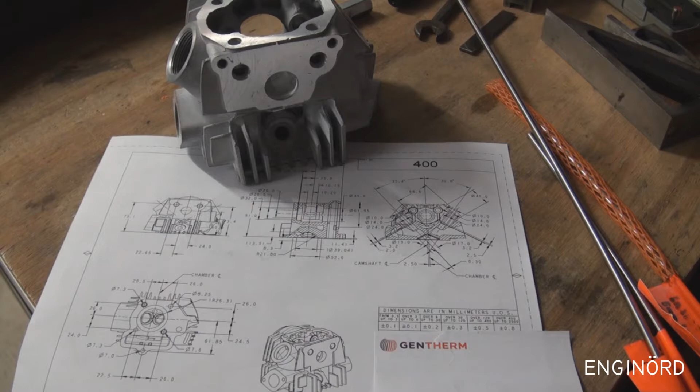You know, the place where ancient artifacts of the industry just lay scattered around for us to admire. Today I'm trying to refine my 3D model and drawing a little bit. I've got this cylinder head, as you can see.

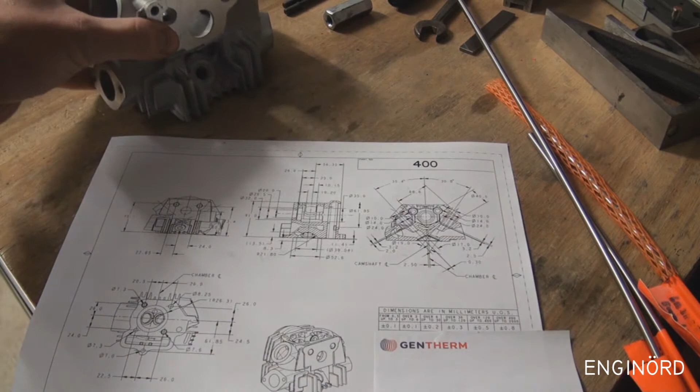And what I did is I 3D scanned the part, and based on the scan I built a 3D model, which is pretty cumbersome. It probably has 500 to 600 features, and based on that I created a drawing. So having the 3D model is one thing, but having the drawing is a completely different beast.

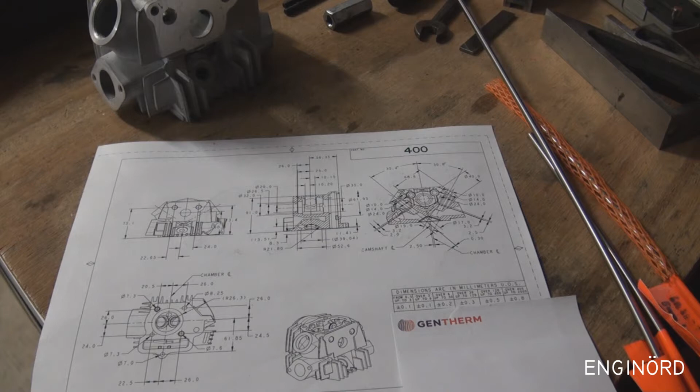I don't know anything about this part, but I need to adapt it to my needs, and so I need to know the exact dimensions. Two of the important dimensions are these two right here. So these angles, those are the angles for the valve. You can see the valve. This is the exhaust valve, and then this is the intake valve, and these dimensions govern the position of the valves.

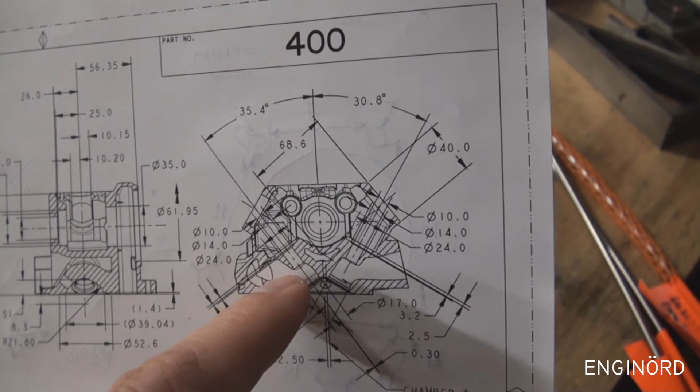So the cylinder head is getting bored, and then there's a bushing that's being pressed in, which is the valve guide, and basically these dimensions will define the exact position of those valves. So these dimensions on the print are just placeholders for right now. They are approximate dimensions. So what I'm trying to do is measure that.

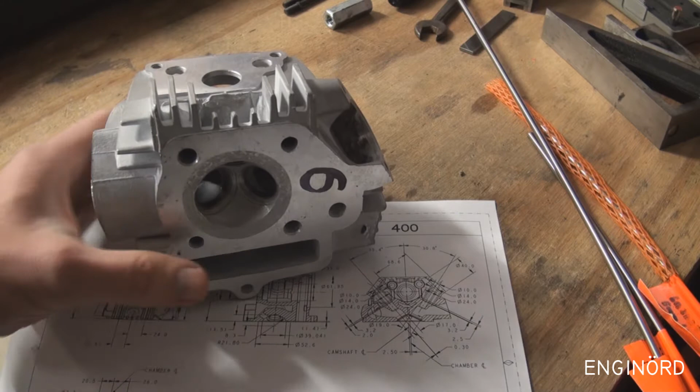Now the 3D scanner is going to give you real nice point cloud data, but one of the problems with the 3D scanner is it's not going to see inside. So like there's this hole, this is the intake bore. It's going to go about 1/2 inch deep, and past that it's not going to see what's inside. So it's pretty much like you are looking at it right now, because there's not much light. You can't really see what's inside.

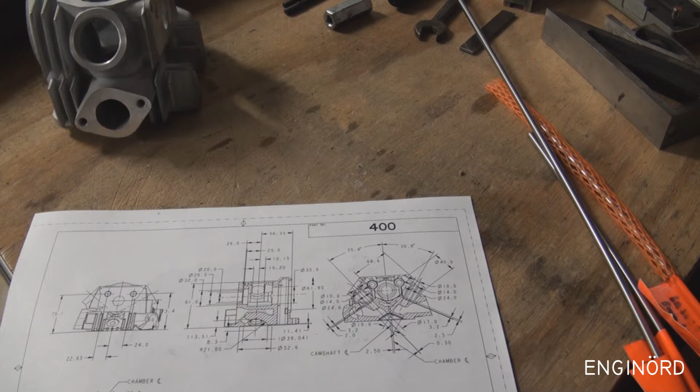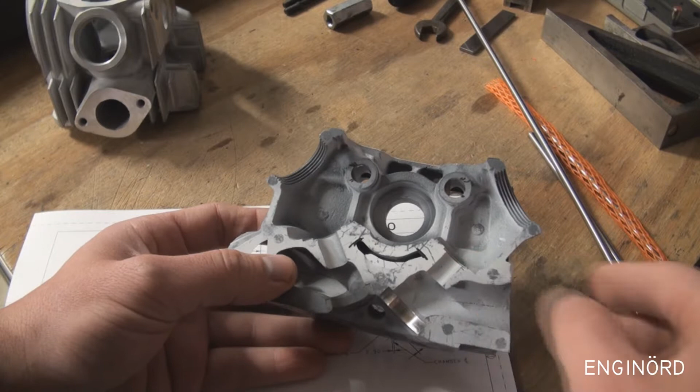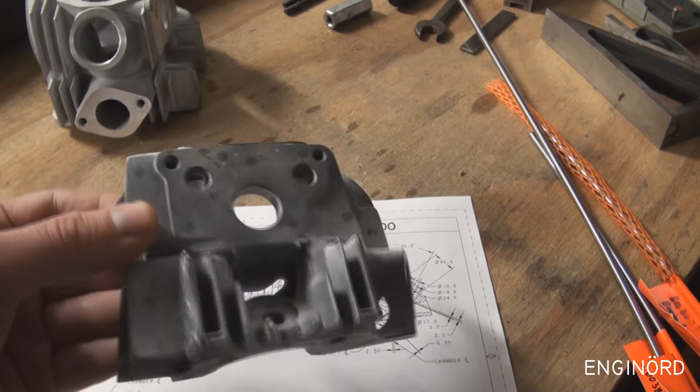So the way I overcame that earlier is I sectioned the cylinder head, and you can see it right here. So now you can pick up exactly the geometry of the intake channel, the exhaust channel, and maybe pick up these edges here and get the angle relative to this bottom plane. This was an older cylinder head, and the new ones I received are slightly different. So now I need to redo my previous work.

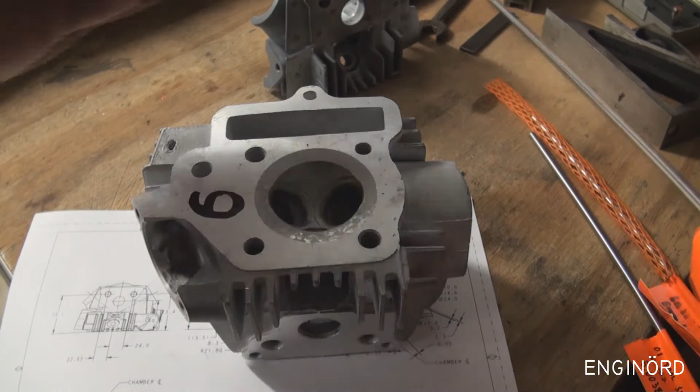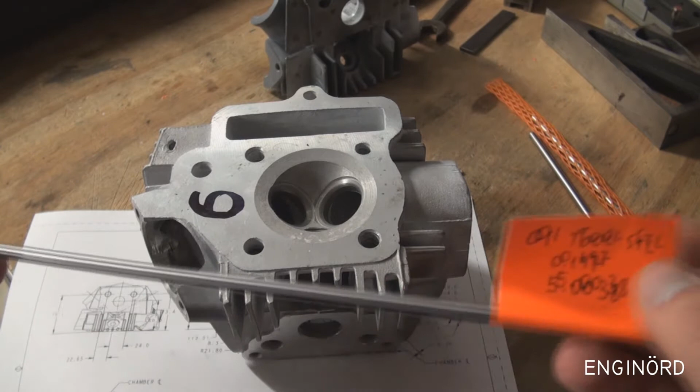So what I came up with is I went ahead and I bought a couple different sizes of these drill rods. They call it drill rods, O1 tool steel. So this designation, that's a nominal size 0.197, which comes out at 5.0038 millimeters. And I just bought a couple different sizes to see which one's gonna fit.

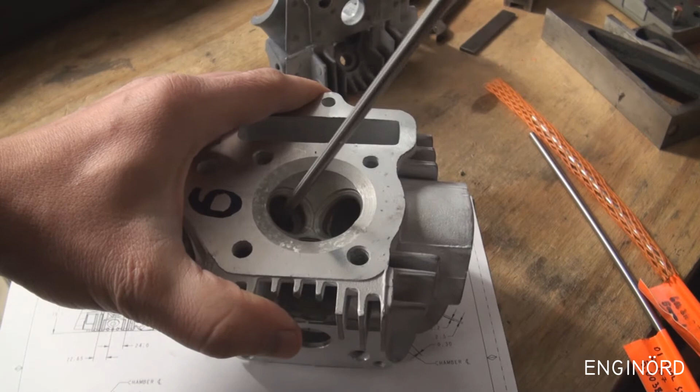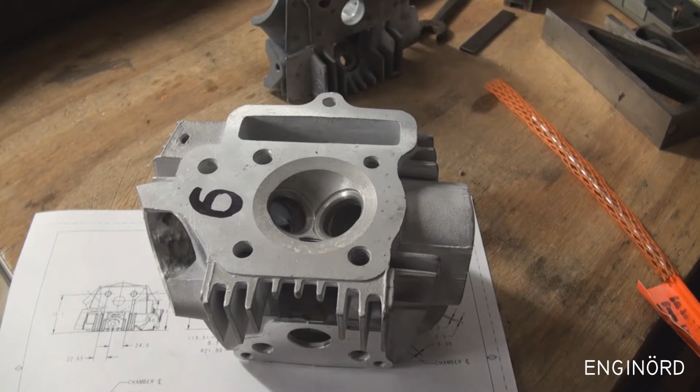So you can see I can use this as a go/no-go gauge. So that's not going into that hole. It's not going into this hole. And I'm not pushing it hard. I don't want to screw up the bushings. So this was the 0.197. Here's another one. This is a 0.194. Okay, so that comes out at 4.9276 millimeters. And you can see that this one slides in. It's got a little wiggle room.

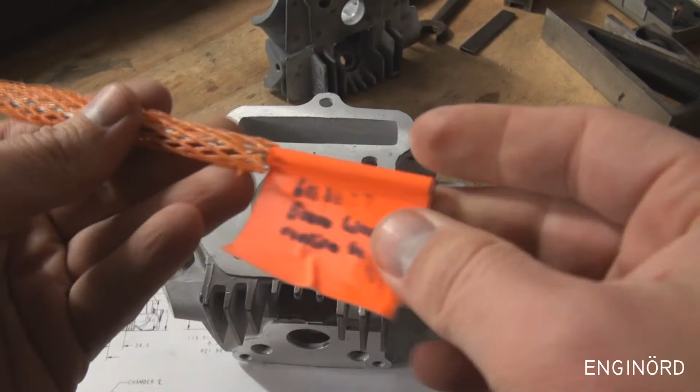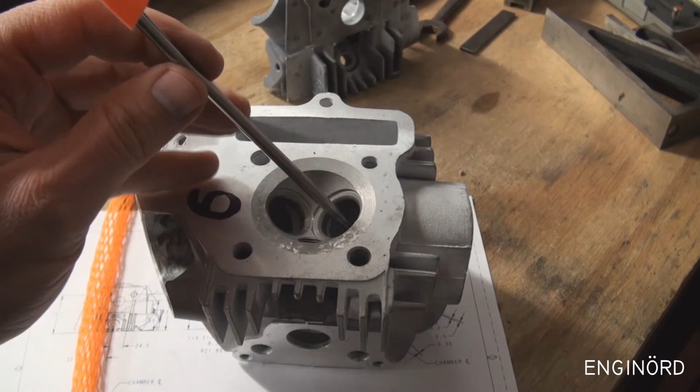And then finally, here's a 5 millimeter rod. This was designated as 5 millimeter. I miked these, and they're pretty much in tolerance. But this is the one that has the best fit. It doesn't have barely any wiggle room, so I'm trying to move it back and forth and I cannot wiggle it. Okay, here's the same thing in the exhaust. So it just goes in and it stays put. It doesn't wiggle.

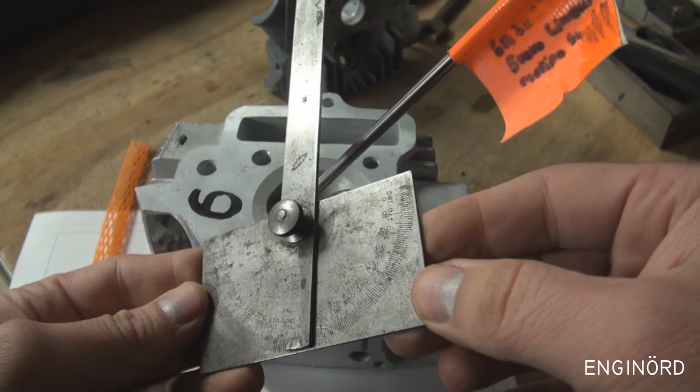So now I have this plane and I have this rod. So it would be easy to use a simple device like this protractor. Okay, it's a little rusty. I'm gonna clean it one day, I promise. So the idea is that I could set it up like so and then hope for the best and basically read the angle down here.

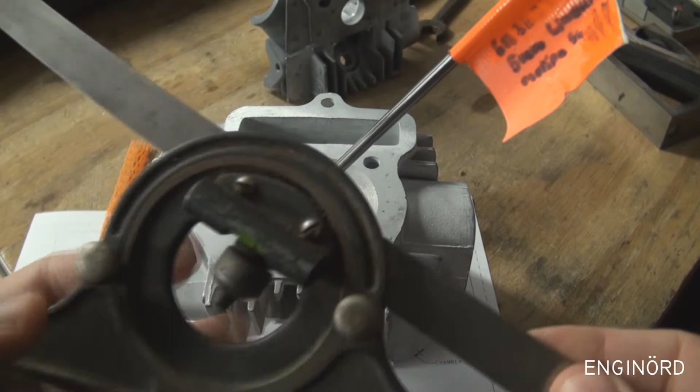But you can see there's several problems with this approach. The first is that this protractor leg doesn't come tangent to the rod because there's a nominal thickness for this guy and for the rod. So the other option is to use a protractor like this one. Okay, I can lay it here like so and then try to bring it close, but again it's not laying on this surface.

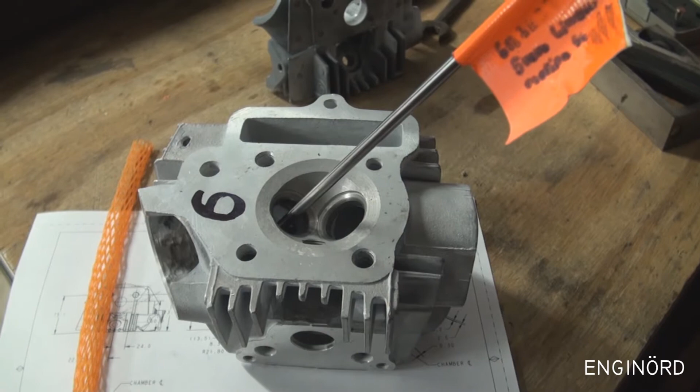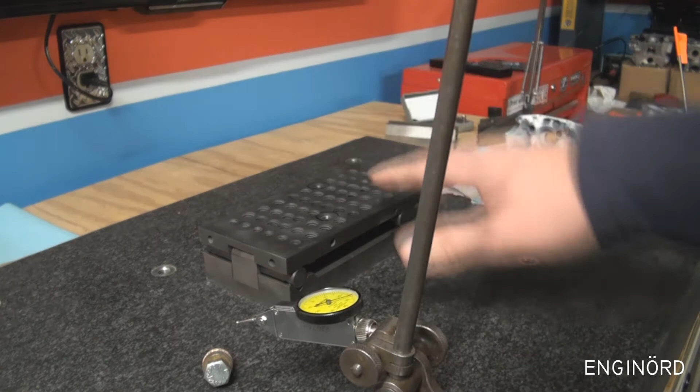So instead of using that protractor, what I'm gonna do is I'm gonna go and use an angle plate or a sine plate. So this is what I'm gonna do. The first thing is I'm gonna go and mount the sine plate down to the granite surface, and for that I'm just gonna use this bolt here.

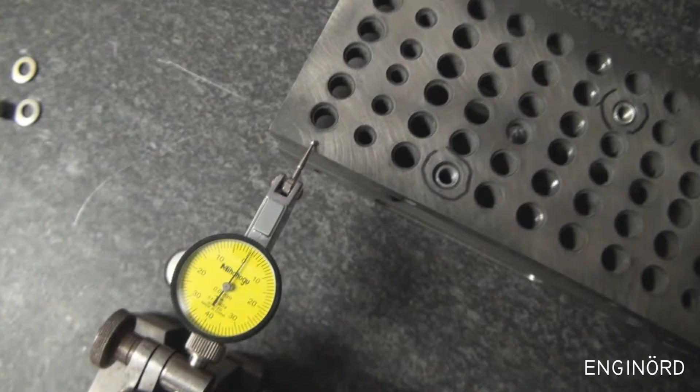Okay, so once it's bolted down, what I can do is set up my indicator and just sweep the surface here. I'll bring you closer. So you can see at this edge right here, the Mitutoyo indicator is set to, let's say, 0. It's close. So 1 division is 10 microns or half a thou.

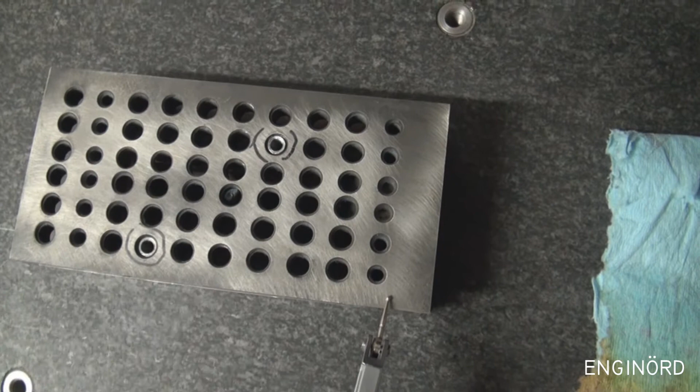So when I'm gonna sweep this, you can see that I have about 4 divisions, so about 1.5 thou difference in height between the two ends. Now that is just something I have to live with. This is one of those tools I don't use really often, so I just blew off the dust and cleaned it. I cleaned the table, cleaned it several times. That's pretty much what I have, 40 microns.

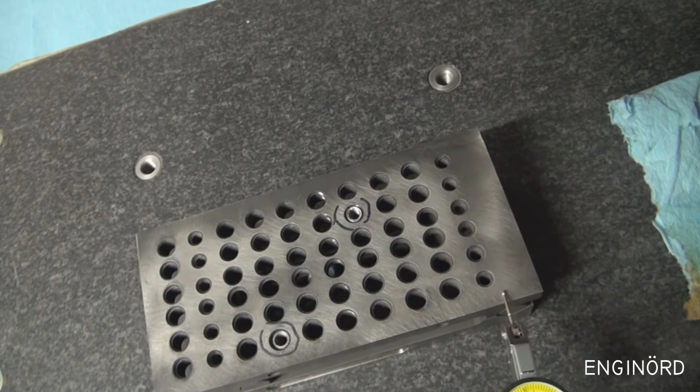So the next thing is I'm gonna take the head and mount the head on the top like so, and then I'm gonna incline the surface, and then the rod sticking out, I'm gonna go and indicate the rod until it's horizontal. I'll bring you back.

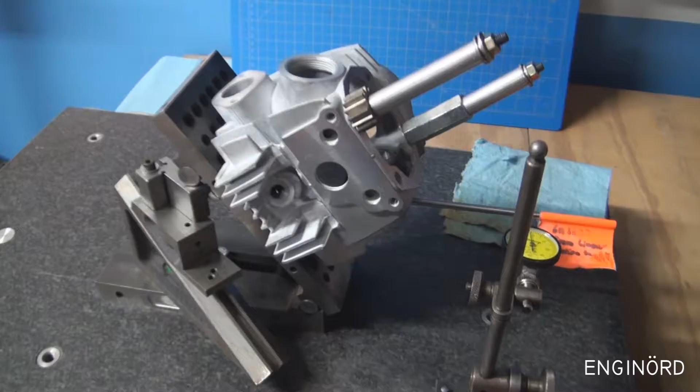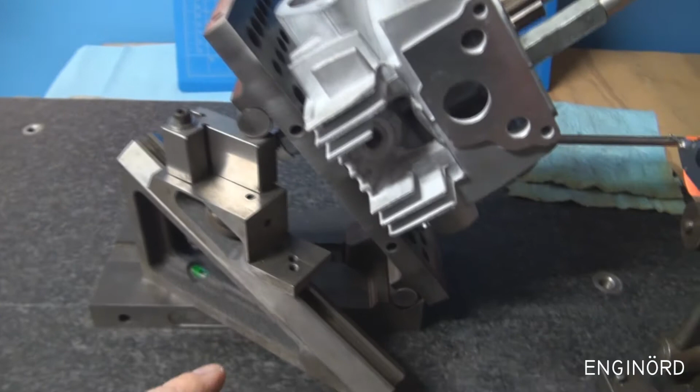So this is the layout. Again, the head is mounted on a sine plate. The sine plate is inclined, and there's the rod, the dowel pin or rod that goes into the socket for the valve. And what I'm doing here is I use the planer gauge to set the height, and I can adjust the planer gauge up and down. Okay, so that will set the height. You can see I'm pressing on this one here, and the planer gauge is reacting that force. So it's setting up this height from this pin to this bottom surface.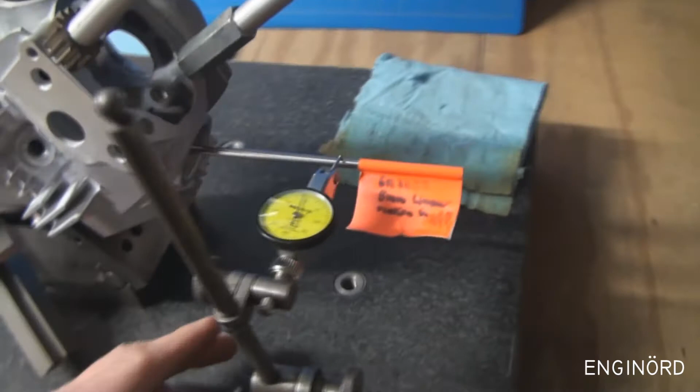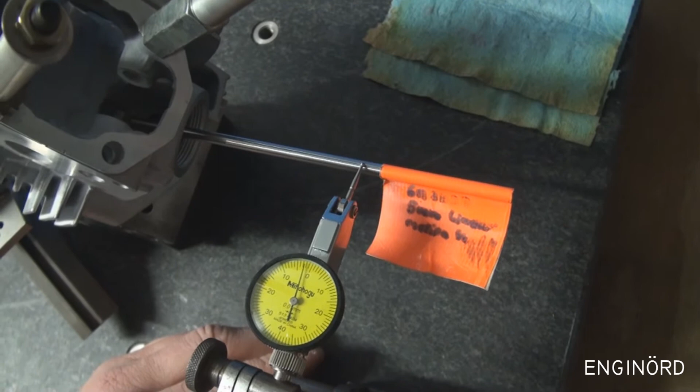And what you can see here is on this end we are running 20 minus, and then on this end we are running, let's say, 0. So 20 microns difference between the two ends. I can also try to sweep this, and you can see that there's 20 micron difference on about 3 inches length. So I think that's good enough, especially knowing that this plate has a certain amount of tolerance built into it.

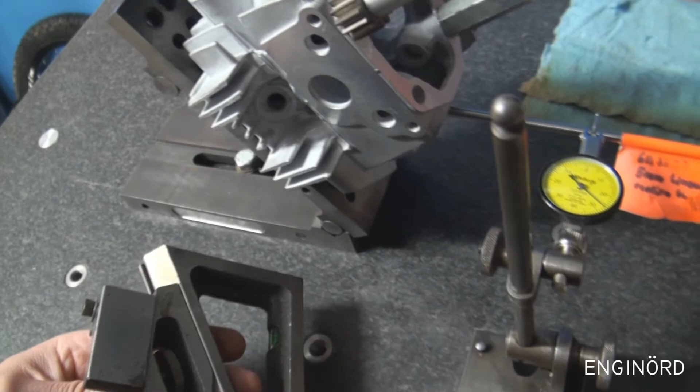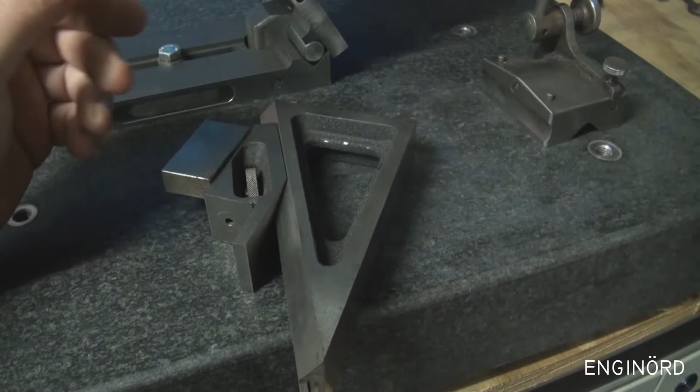Now the next thing is to take the planer gauge and measure this distance, which comes out to 104 millimeters. Look at that, 2 decimal precision. 104.01. So this is what we have. The rise is 104.01. And then the long side is 5 inches because the spacing between the two pins on the sine plate is 5 inches, so that's 127 millimeters.

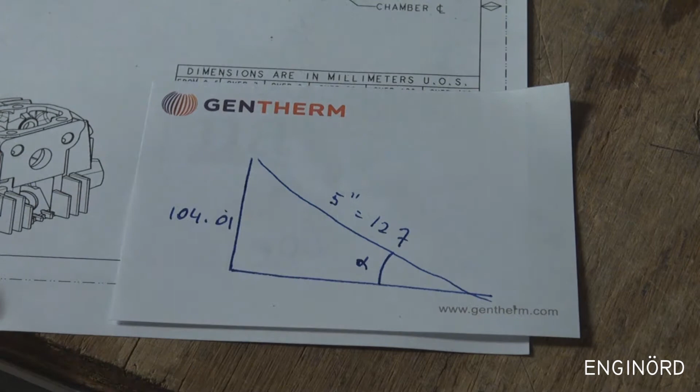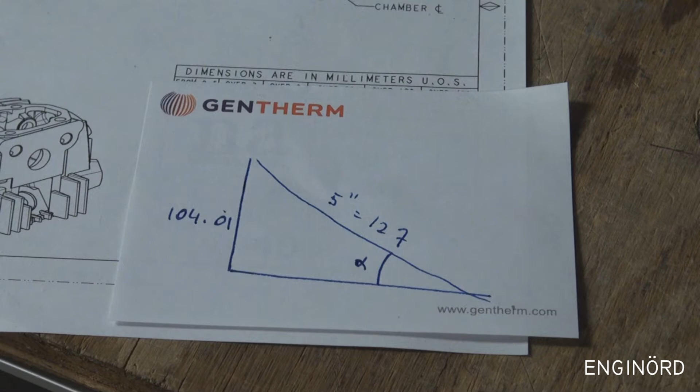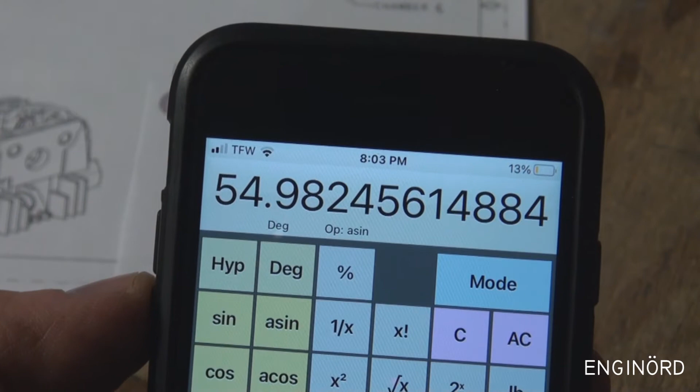So now you can see why it is called a sine plate. If we divide this by that, and then we calculate the sine, that gives us that angle. So 104.01 divided by 127, that's 0.818, and then we need the arc sine of that. Okay, so it comes out 54.98. So we can safely assume that's 55 degrees.

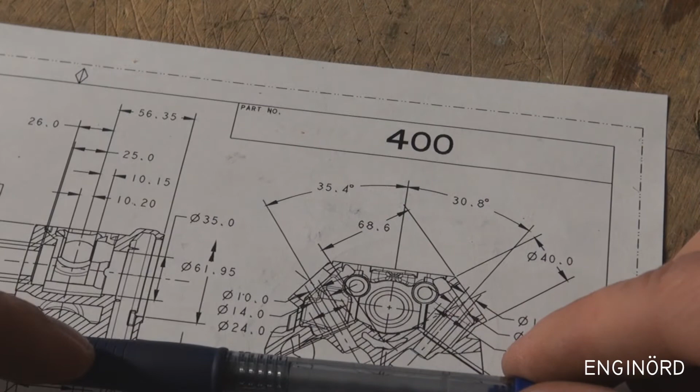This was on the exhaust side, and you can see my print shows 35.4 degrees. So I need to go back and adjust it to 35. So basically I measured this angle here from this plane to there. Okay, so 90 minus 55 would be 35. So let's go and do the other side.

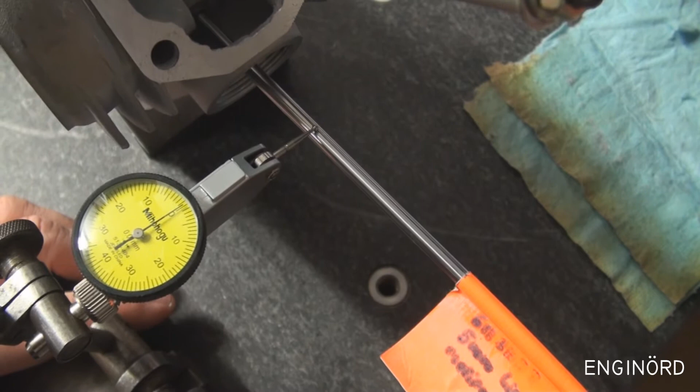So here's the second setup. This is the exhaust. Right now we are looking into the intake side using the same rod. It's placed, and you can see on this side the indicator is 0, and I'm going to try to sweep it, and you can see on this side it is 0 also, so it pretty much stays put. If I move it off, you can see it will go off. If I go back, you can see it will stop at 0. So this leveling is better than what we had previously.

What I did is I added a little machinist jack here. So with the machinist jack I can fine tune the height, and I'm copying the height the same way. So this is the planer gauge. Just gonna slide it in there, so it's the same height. I can take out the planer gauge and go and measure the size. So you can see the size this time is 108.53.

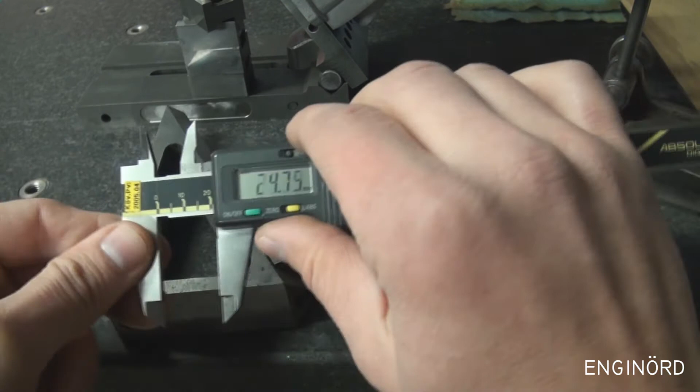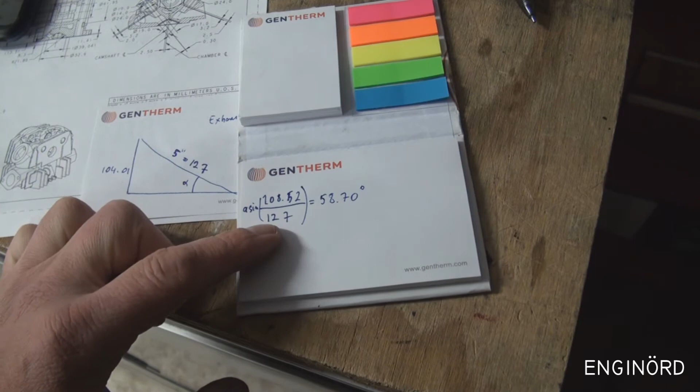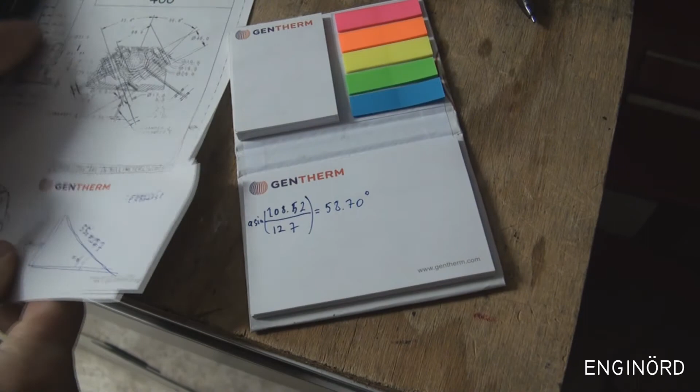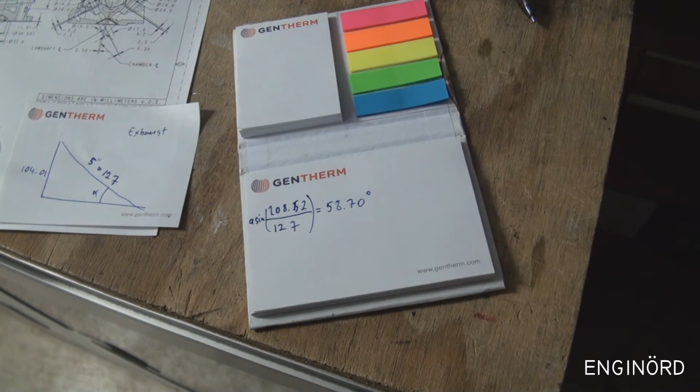Let's do it again. 108.51. 108.52. So 108.52 divided by 127, and the arc sine of that is 58.70 degrees. And my previous angle that I had was 30.8. So it's pretty close. I don't know why it is not an even number, but that's just what I have. I'll probably lay out a couple more heads and try to measure those and see what the average number is.

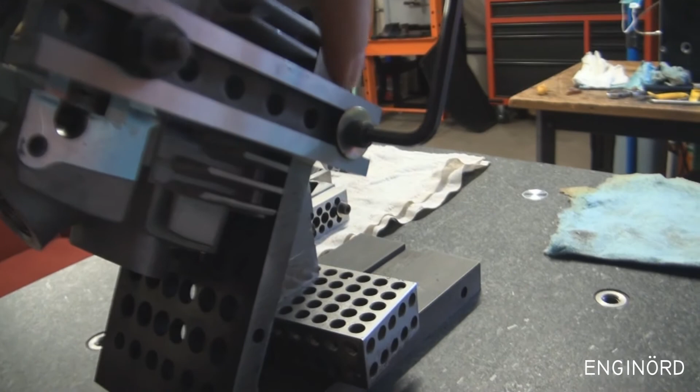I know this looks strange and suspicious, I changed the layout. So what I found out is that the edge of the sine plate might not have been parallel to this machined surface, or the machined surface on the other side. So what I ended up doing is I added a fence. You can see the fence here, it's just bolted on. It's got a little spacer. And now this machined edge is parallel to the machined edge of the sine plate.

So that when I angle the sine plate, I can be sure that this pin is parallel to the edge of the sine plate. So again, when I incline the sine plate, I can be sure that the plane in which the pin resides is parallel to this plane here.

And so I just repeated what I did before, indicated this end. So you can see that right there, it's 10 plus, and then on this end it's 15 minus. So I was trying to be within 20 microns. This is 25 in this case. Maybe it's just me poking around with the left hand in a workshop; an indicator is not perfect.

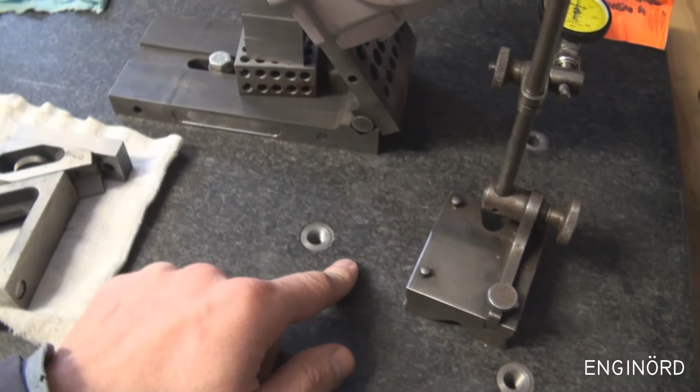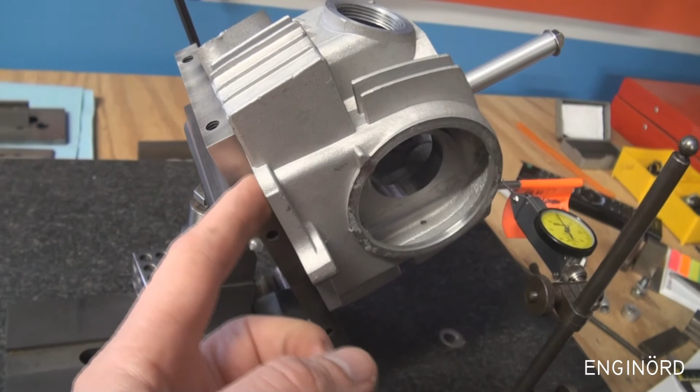So basically this is parallel to the black top, okay, and then this little machinist jack helps me to move it up and down a little bit, and that way I can come up with the angle. So I did two measurements. On the first measurement I was mating this surface to the angle plate, and then in the second set of measurements I was mating this plate to the angle plate, and the numbers are in and they're pretty consistent.

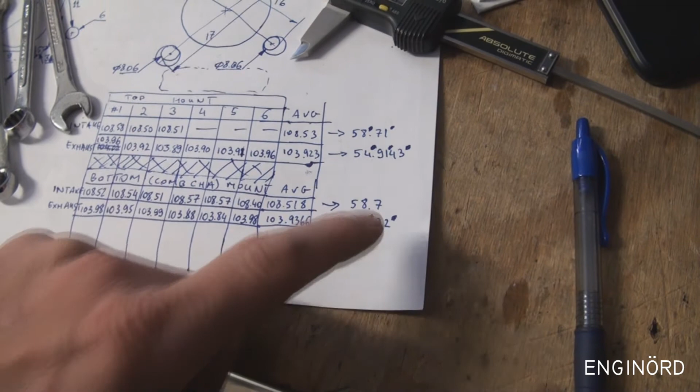So the intake side is 58.7 degrees, and then the exhaust side is 54.92, so we can safely say this is 55 degrees. So what I'm going to do is create a test and look if I can find the angle for this plate here, which is precision ground, and so that angle should be really precise. So let's do a test.

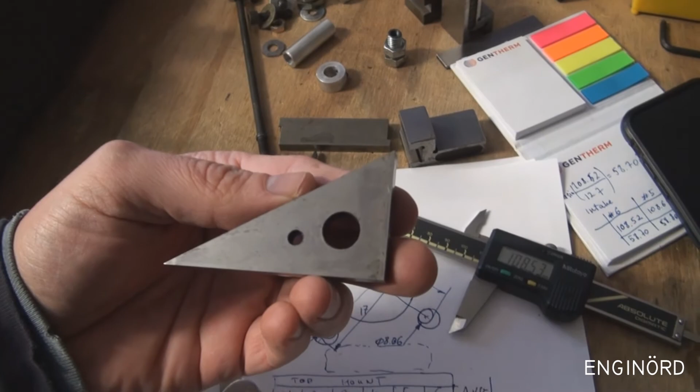So you can see the setup. I inclined the sine plate, and right here is this precision angle plate. Okay, so I can now move my indicator along that surface. So you can see the tip of the indicator is on that surface, and when I move the indicator, it's mostly just frictional. If I move it this way, you can see it changes like 10 microns maybe. So you can see this way it doesn't change much. Again, if I move it left and right, it might change 10 microns.

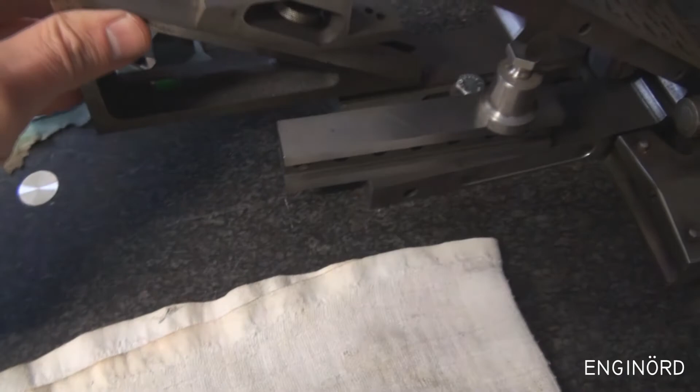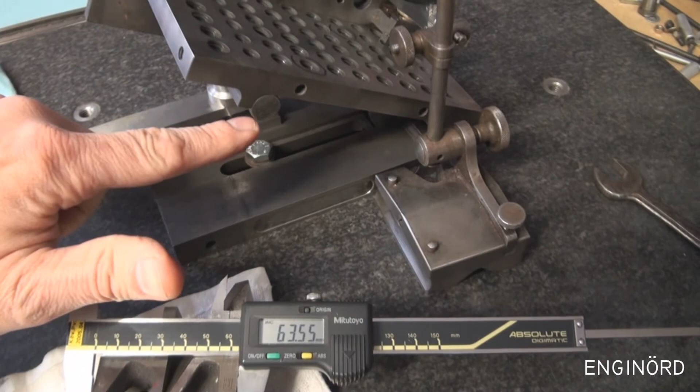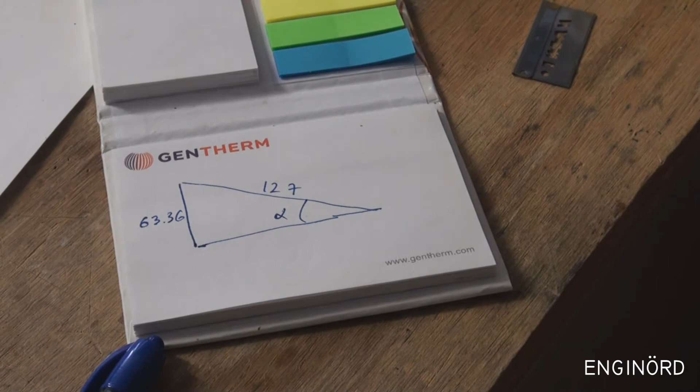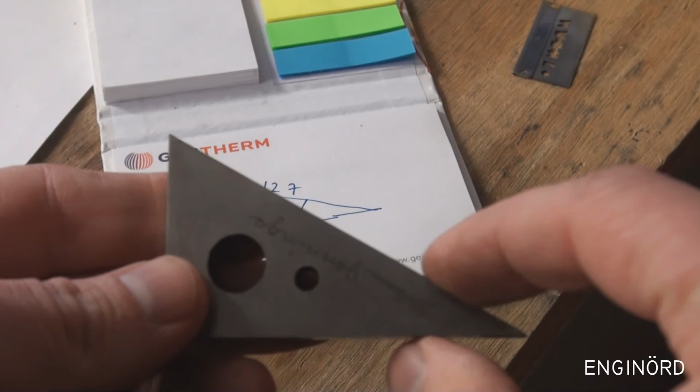So now I can go and take my planer gauge, put it in there, adjust the planer gauge, and then get the size. So here's the size, 63.36. Again, I'm measuring with the planer gauge this height here, 63.36. So 63.36 is the height or the rise, and then 127. So 63.36 divided by 127 is 0.4988, and then the arcsine of that is 29.92. So that's a 30-degree angle. So basically this angle here is 30 degrees, and it's a precision ground plate.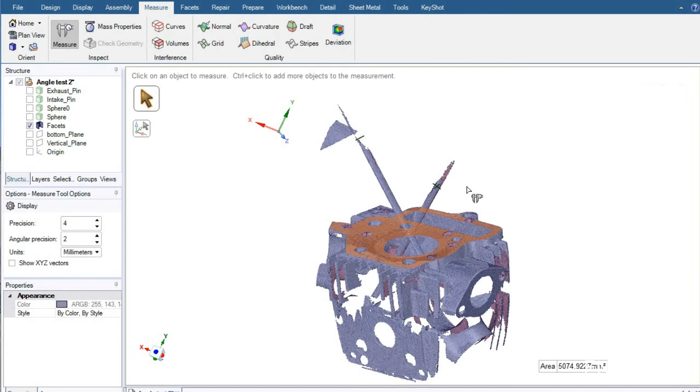I established the plane on this bottom surface using a neat trick. You can double click on an area and then move this slider up, and you can see the software is gonna select all the points that it thinks are part of that feature. Now just simply clicking a plane is gonna establish a plane on that surface. I did the same trick with these two surfaces. You can see if I just double click on a surface, it will recognize that as a cylinder and basically add the cylinder through the surface. If I lift the slider too high, it's going to merge these two together, so that's not what we want.

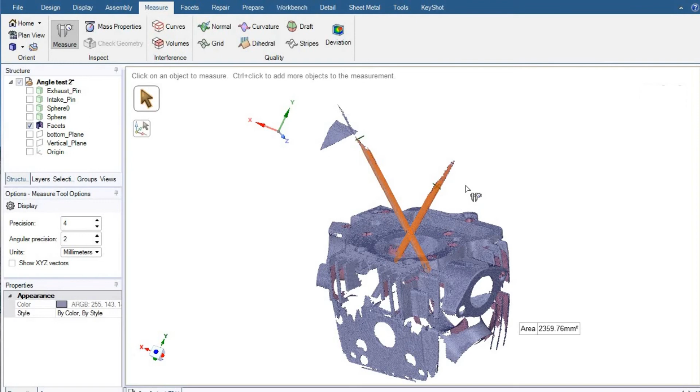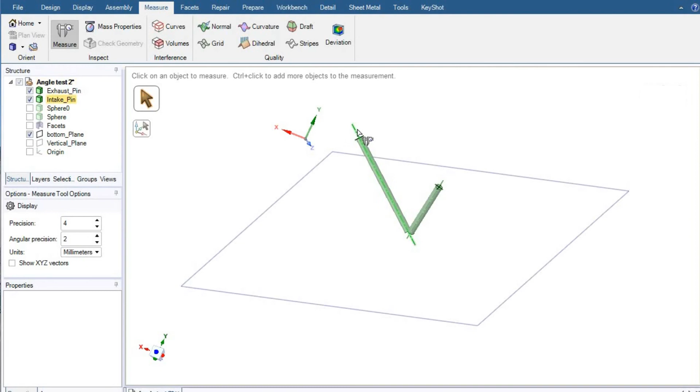So this way I created the bottom plane that you can see here and these two pins. These are actual features in the file. Now I can turn off the facets, and that will allow us to turn and rotate and move it a lot easier. This is a large file, it's over 200 megabytes. So now I can select the center line of one of the cylinders and the plane, and you can see the angle shows up 58 degrees, 58.77 degrees. We actually measured 58.70 degrees with the sine plate, so that's pretty close.

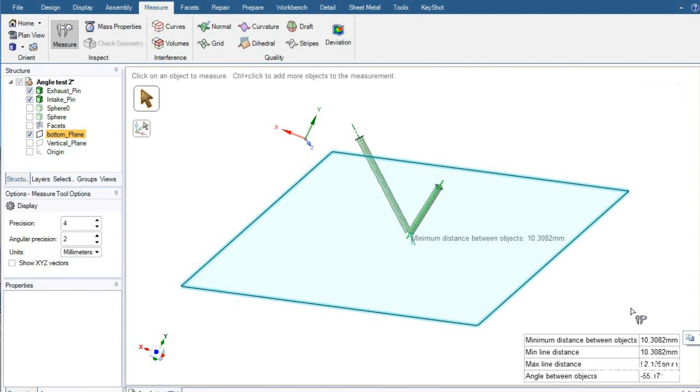Now let's measure the other one. So here's the center line, there's the plane, and the angle shows up at 55.17 degrees. We actually measured 54.92 degrees using the method with the sine plate. So you can see that the sine plate measuring method and the 3D scan are pretty close. I hope you find this video useful and learn something about the angle measurement on a sine plate.